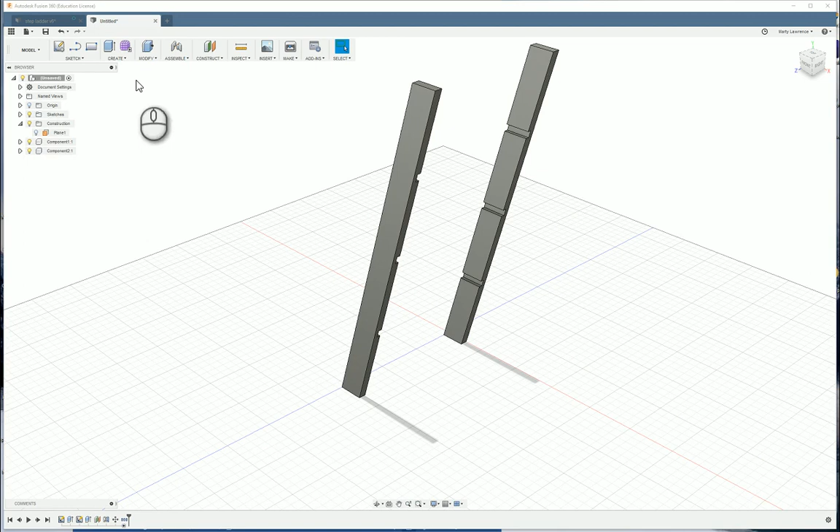We can add an appearance to this as well. So appearance - just remember if you want to use any of these other appearances, and I've got this download button, so make sure you download it first before you can drag it on there. Okay, once those arrows go away, it's okay to use. You can drag it onto your project.

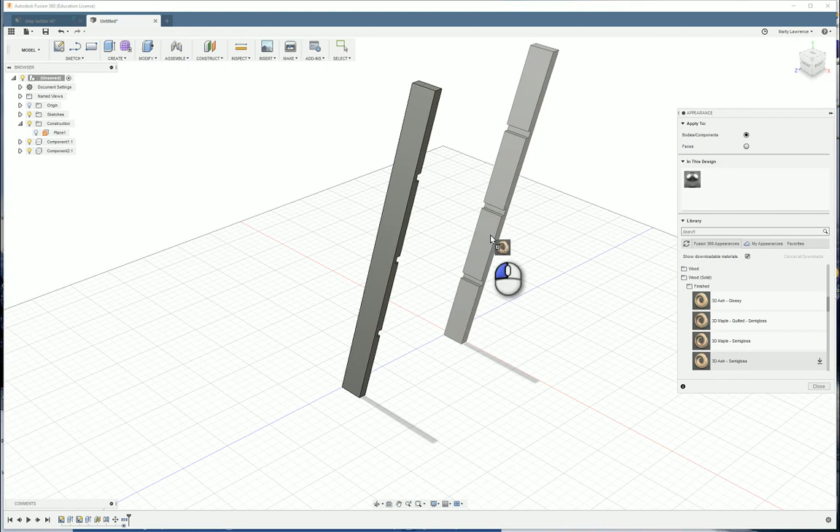I'm going to choose the maple because that's the timber we're using. Drag it onto my project. See, that's the one I want - I don't want the quilted one. Drag it onto my project and we're done.

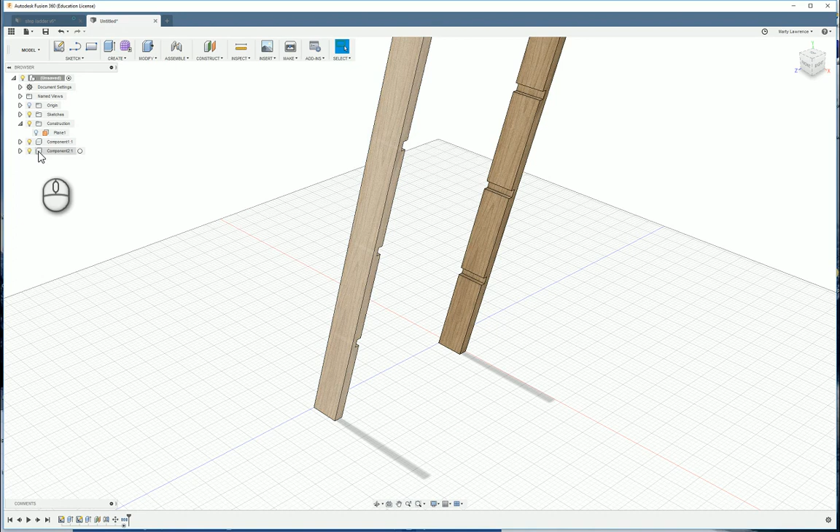Okay, we're going to create the steps. First thing we're going to do there is turn one of these off so we can only see one leg. So we've got these light bulbs over here. I want to turn off this one, the one that I can't see the joint on. So click that - alright, so we're only seeing one of them.

Create sketch. Okay, zoom in until you select that inside face - make sure we don't hit the wrong face, but this inside face. Because of the way the angle is, I know this is the bottom of my leg, this is the front, and this is the back. So that's important to know.

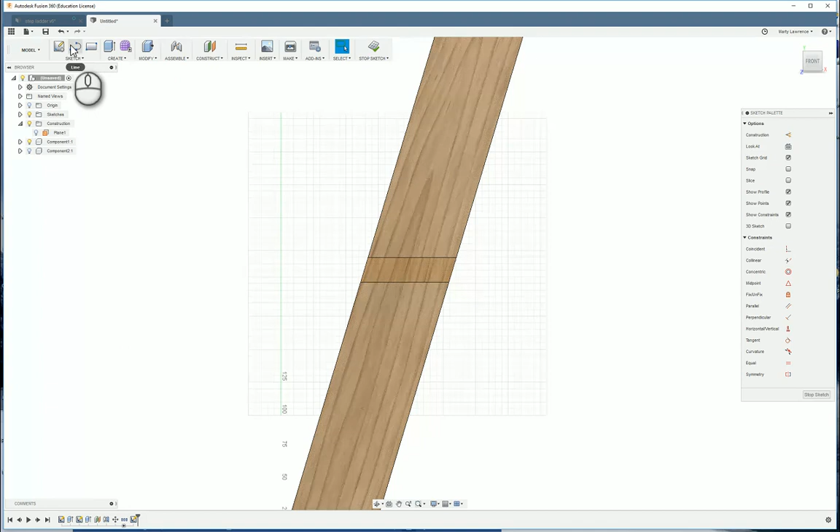And we're going to select the line tool. I'm going to start at the back, right in that corner - make sure I get that little square to show it's the corner. Click once. This one wants to be parallel with that existing line, so it should say 180 degrees, and those two little parallel marks that you can see turn up. Alright, so make sure it's parallel. Don't click, but simply type 90mm. Press enter.

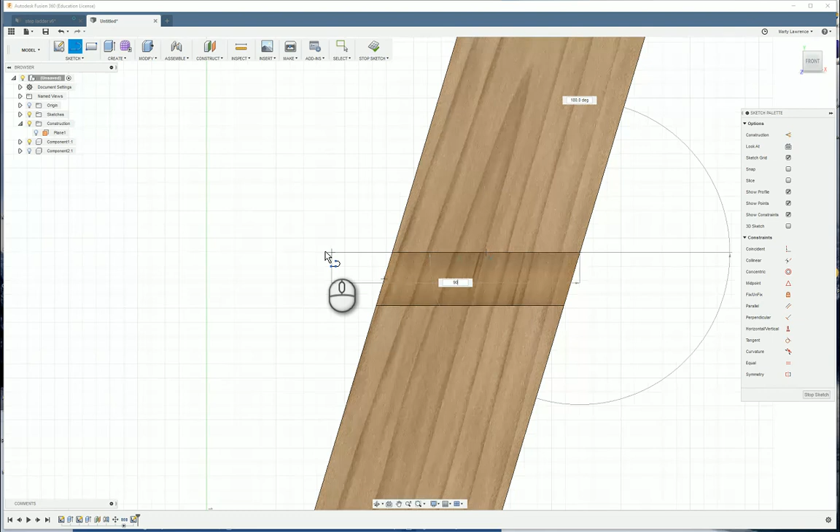Line tool again. This time, from this edge, we're going to go down. We want this one to be 90 degrees, so it might snap there. If not, remember, you can tab across and make it 90 degrees, then tab again, and this one's going to be 19.

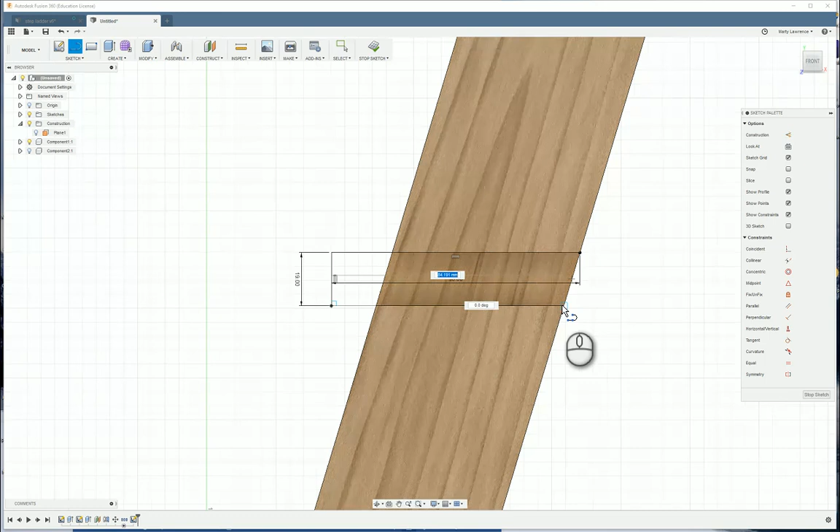Press enter. Last line, from this all the way back to the back edge here. Okay, again it should be parallel with that line, and make sure you click in the corner and click. We can stop sketch now.

Let's turn this component back on and we're going to extrude. Alright, what profile? This new profile we just drew. So you're going to have to click twice here on that part and that part. The extent, we're going to change that so it says to object.

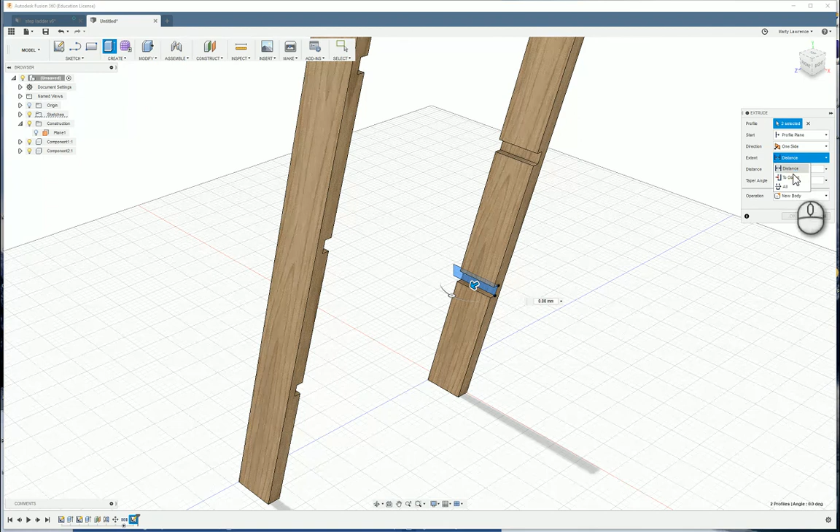Rotate your view and click in that face inside that joint. Alright, before you click OK, make sure the operation is not a join, but it's a new body. And click OK.

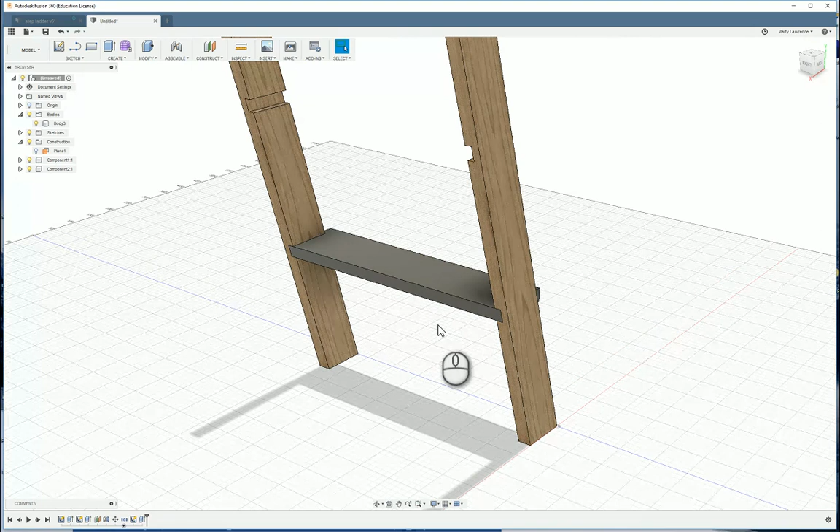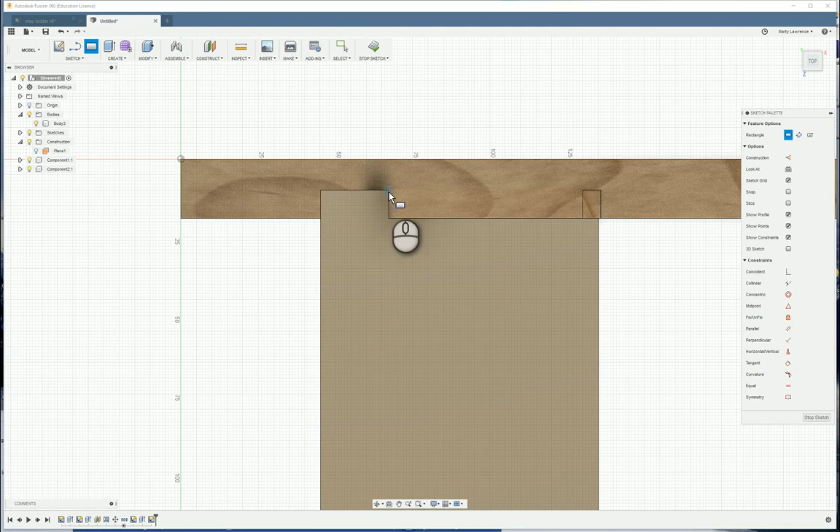Alright, we've got two little cutouts to do on this step, which we will do by starting a sketch on that top surface. Rectangle tool. We're going to start in this corner, so where those two meet, you get a little corner. So we can start our rectangle there, click there, and we're going to click over on this edge.

Then we need to set our size from this line to this line - has to be 20.

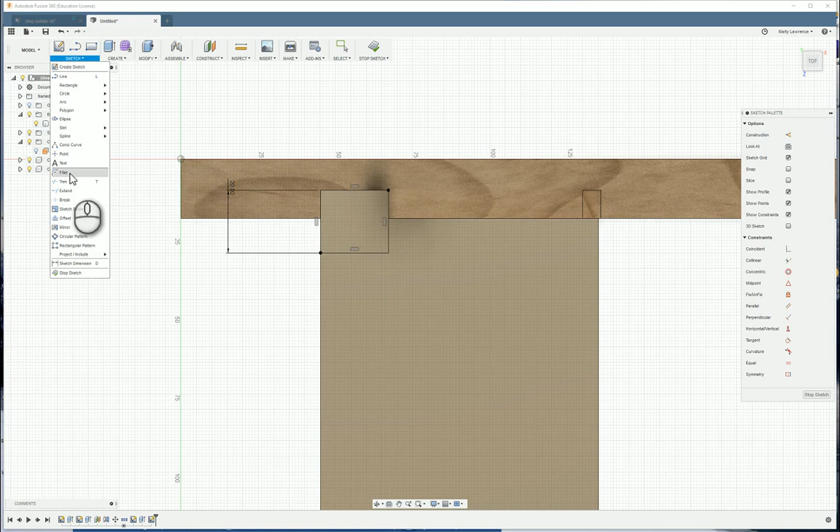Lastly, for this sketch is a fillet. You'll find that under the sketch menu, and we'll have to click so that we get that little red dot and the red line, and click and type in 11.

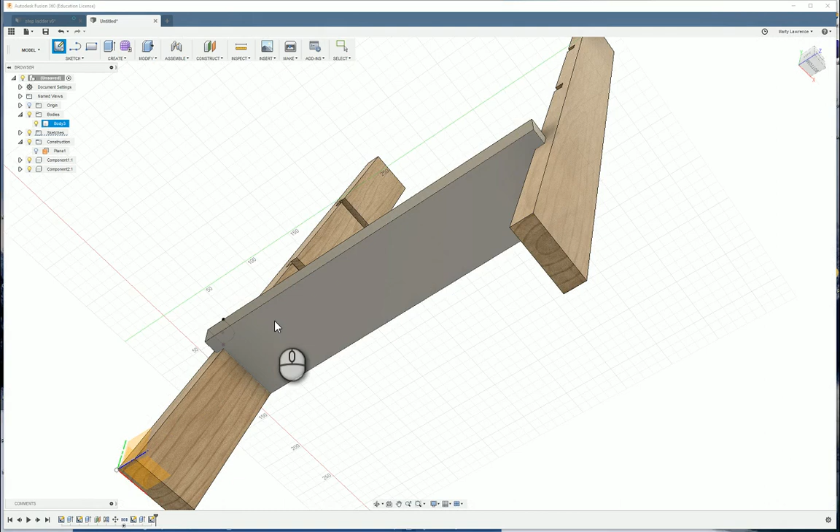We're done with that sketch, so we'll stop the sketch. We're going to rotate our view now and create a similar sketch on the bottom here. So create sketch, sit on the bottom there, but we'll need to rotate the view so I can see into this corner where it overlaps. For some reason we'll have to do this project, include, and intersect.

What geometry do you want to project? We want to click on this edge here, and that's kind of all we have to do. Click OK.

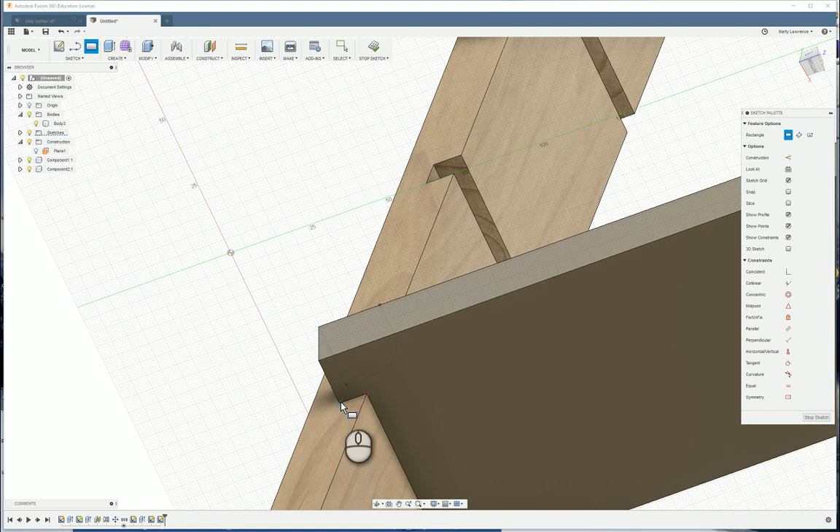Rectangle tool again. We'll start in the corner. Now we can hover your mouse over that point, then move it out so you can see that dotted line appear. It won't appear unless you hover there first and then click.

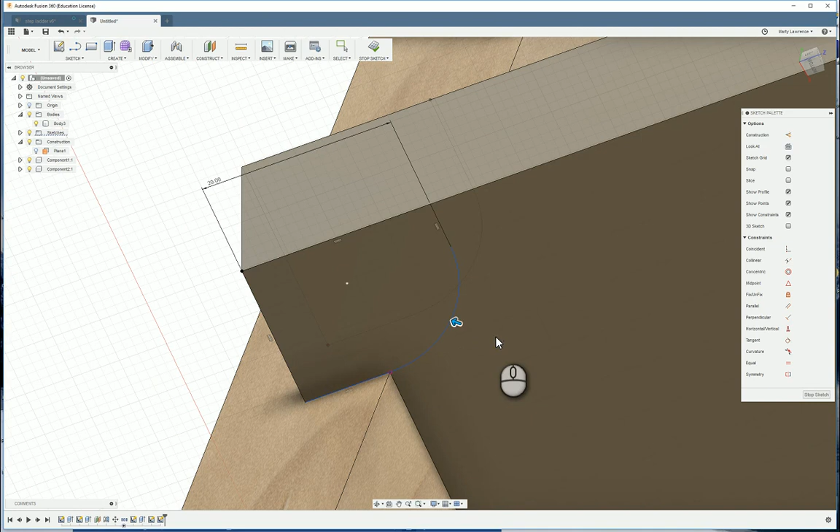We'll select our dimension tool from this line to the edge, and again we're going to make that 20, and again we're going to use the fillet tool. Click, and again this is 11. Click OK, and we can stop that sketch.

Let's zoom back and get back to the home view. Rotate it. Next step is the thing called a loft. That's under the Create menu. There's the Loft tool there.

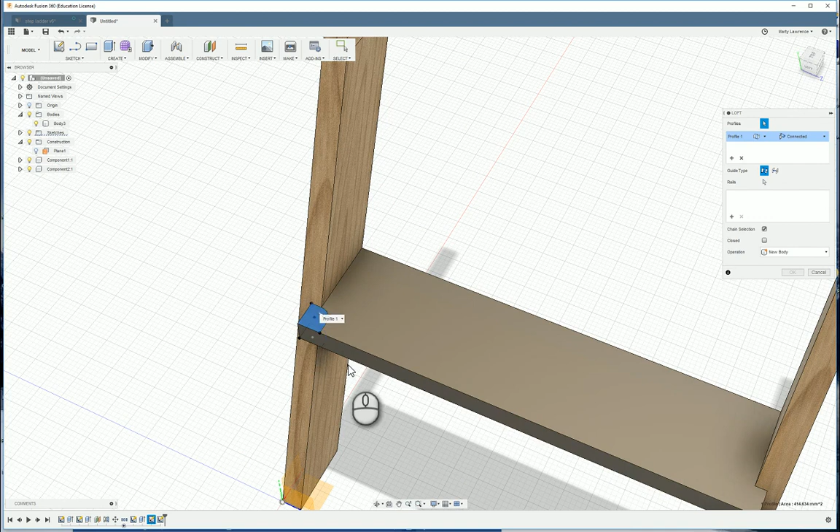Click that, and it's asking what profile you want to loft. So that sketch we just drew, we want that profile. Rotate the view and that profile. That should be all you need to do. Make sure it says cut. Click OK, that's done our cutout.

We need to repeat that over here, and again the easiest way to do that is a mirror. So create mirror. This time we want to mirror the features, so click on the features, then you'll have to go back into the timeline. What objects do you want to mirror? It's the loft, so click on the loft, mirror plane.

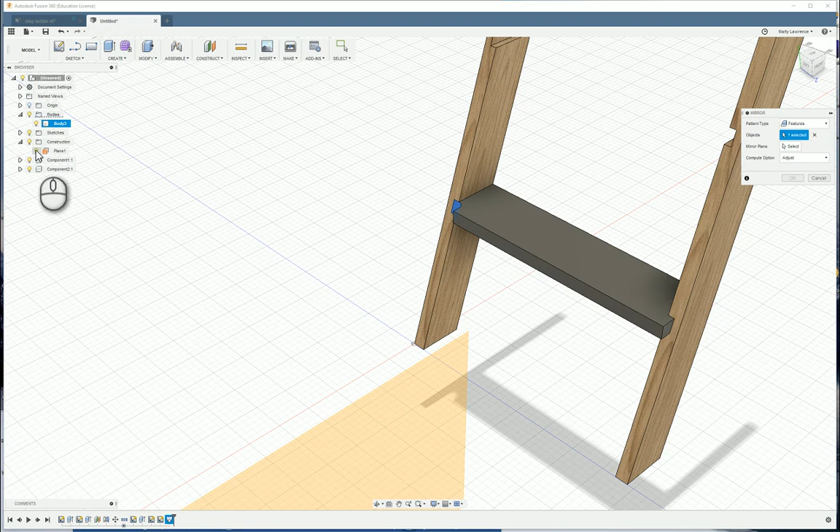You'll have to go back to this construction menu here and turn that plane we used before on, and that's the one we select for our mirror plane. Then click OK. That repeated that over there. That's good, we can turn that plane off now.

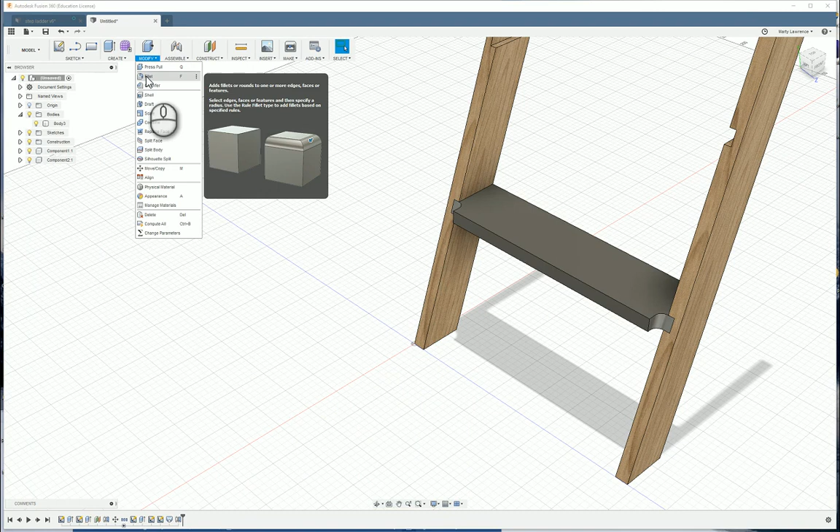Lastly, all we need to do for this step is a fillet. Make sure you choose the fillet underneath the modify menu, or the F button. What edge? It's the top edge of this step. Click once. What size do you want to fillet? That's what it's asking here, and it's 10. Click OK.

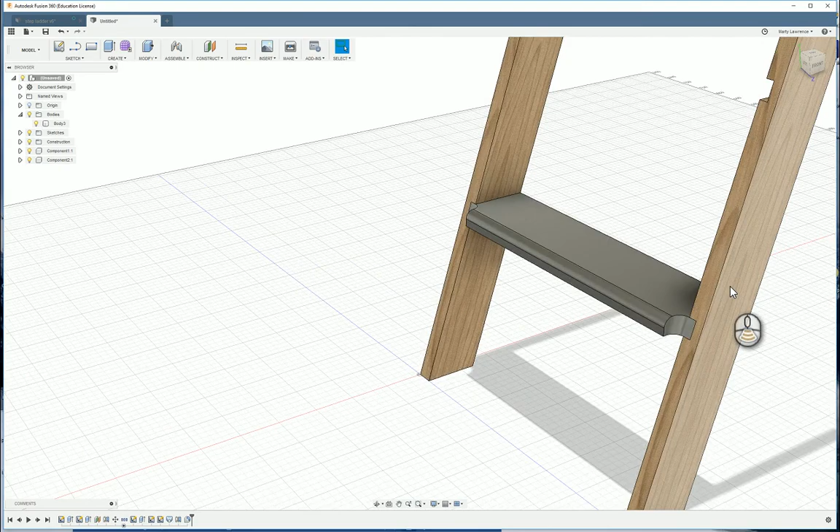That's all the drawing we need to do there. So let's change the view so we can see the back. We're going to create a component. So right click on that body we just created, create components.

If you want to do your appearance again, let's do that, and I'll drag that onto there. Close. Alright, we just need to create copies of this.

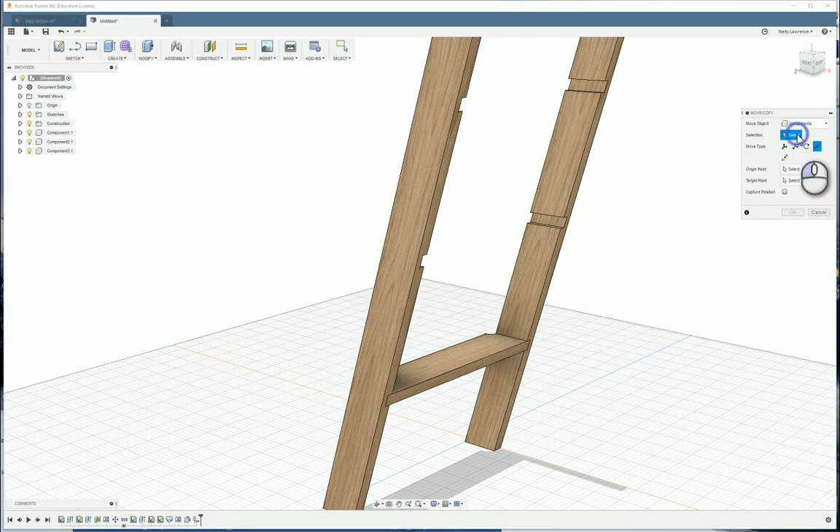So we use the move tool again. What object do you want to move? Well, it's actually a component this time, so click on the components. What component? Yeah, it is that component. What type of move? We're actually going to do a point-to-point. So select the point-to-point, and it's asking what's the origin point? So we're going to use that point here, right in the bottom corner.

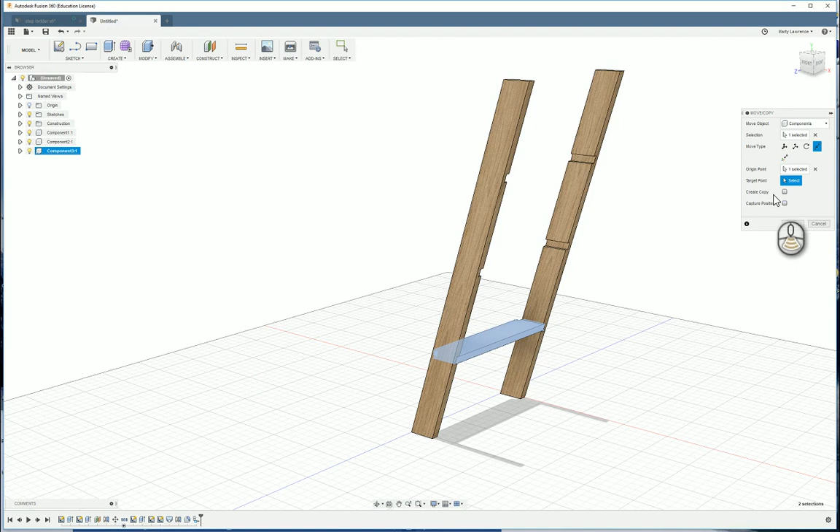What's the target point? And we'll want to create a copy, so put a tick in create copy, then the target point, and this time we're going to hit that bottom edge of that joint. Click, we've created a copy, we click OK.

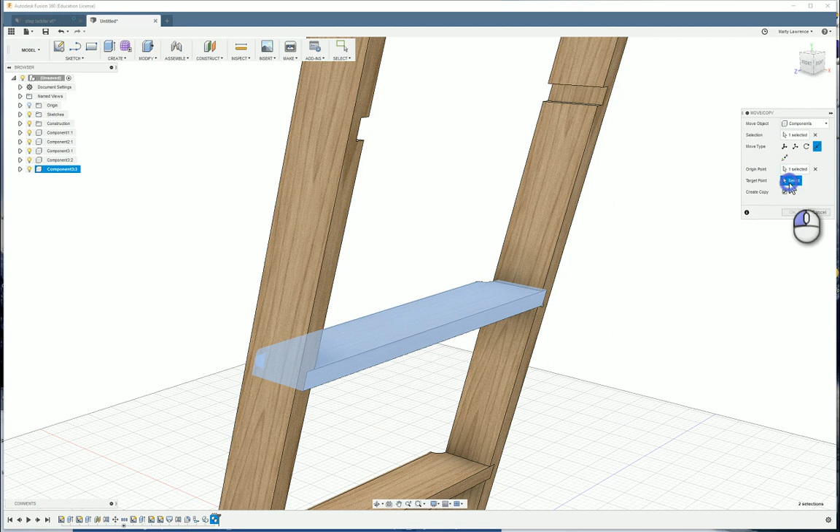We do the same thing for the next step up. So move tool, components, what component, which this time we'll do this one, point to point, origin point, click, create copy, target point, this one. Click OK.

We're done. There's our steps for our stepladder.